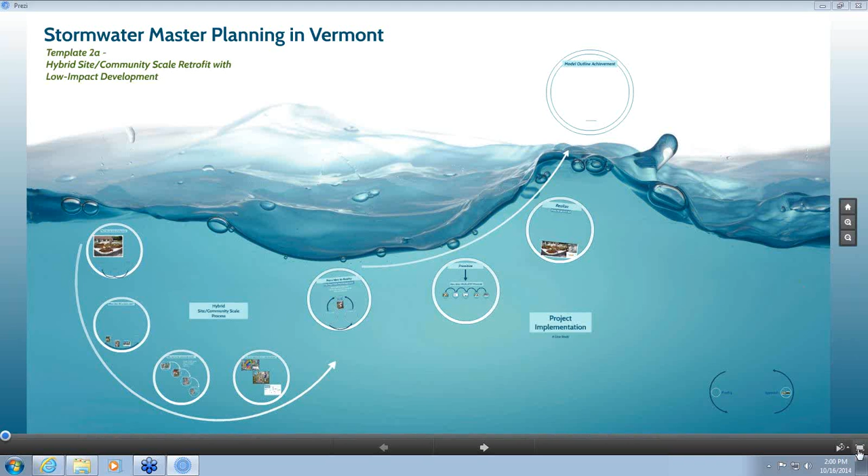Today's webinar is the third in a series of 5 on stormwater master planning, each one focusing on a different approach. Today we're looking at an approach that utilizes community-wide and site-specific modeling.

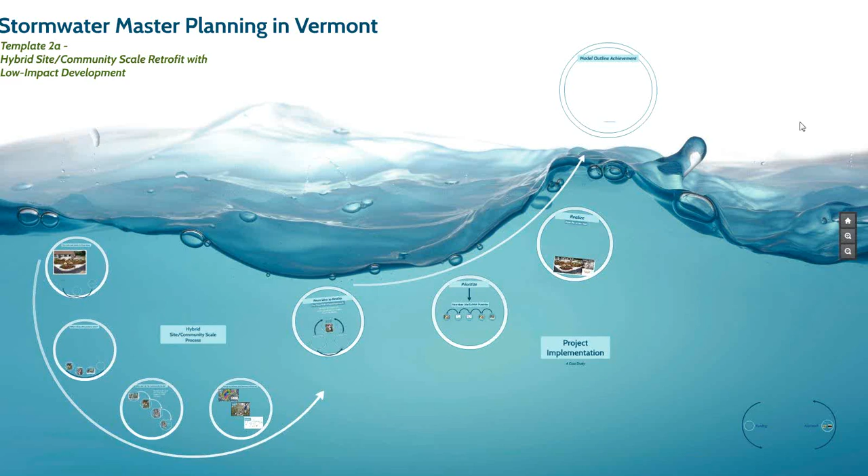So who should use this template? This is actually a fairly widely applicable template across the state of Vermont. We can talk about municipalities with large and small urbanized areas and suitable on-site conditions. Large and small urbanized areas, fairly self-explanatory, anywhere from potentially downtown Burlington to a smaller area like the developed corridor in Waitsfield, which is where we're going to be primarily focusing today.

But what exactly constitutes suitable on-site conditions? Primarily for the development of green stormwater infrastructure and low-impact development, we're talking about generally good soil, or soils that can be amended to allow for good infiltration, typically half an inch an hour or greater is something that you strive for. Recently there's been some research coming out about how to amend soil specifically for things like clay layers or barriers of that sort. So just because the soils in a particular location aren't naturally good doesn't mean that you can't work with them to make them somewhat better for your particular project.

The other thing that we like to talk a lot about with these low-impact development practices, site-specific practices, is open space. The existence of open space makes developing these projects a lot easier. However, it doesn't have to be existing open space. In fact, as we'll see today, there was an option for what appeared to be open space, which in fact wasn't developable, and the designers ended up creating some open space to build this practice. So as you're looking through this template, ideally open space with good soil is the perfect location. If you don't have that, though, don't necessarily write this template off as something you could use.

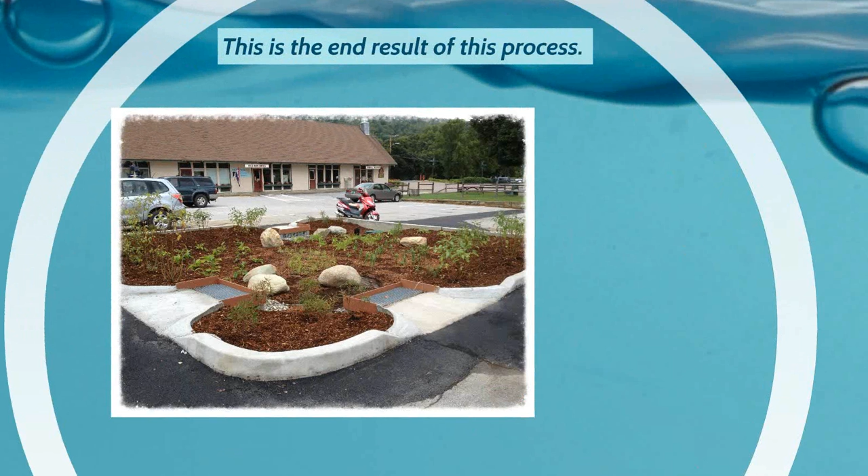So we're just going to start by talking generally about what we mean by the site, or community to site scale process. First off, I wanted to give you an idea of what this is going to look like at the end. We're going to go from a relatively large area down to a very small area as we show here.

What we've got here is a medium-sized bioretention area in the middle of a large parking lot in Waitsfield. This was actually a project co-developed by Stephanie Hurley at UVM, and Watershed did some of the design work towards the end stages of the process, and some of the operation and maintenance. So what you've got is a medium-sized bioretention area that really fits the site and responds to the needs of the community. You've looked at the watershed needs, identified some hotspots, identified some priorities, triaged it down, and then you end up with this bioretention site, or whatever the practice happens to be, where it most needs to be.

So how does this process work? Well, first off, let's just talk a little bit about low-impact development and green stormwater infrastructure. What do we mean when we're talking about this? We're essentially using the toolbox that we've talked about in the past couple of webinars—a toolbox of design and planning techniques.

Essentially what we're trying to do here is disconnect impervious cover, increase infiltration opportunities, and generally reduce stormwater runoff. Because as we've seen before, what you really want is something closer to a natural condition: 10% runoff or even less potentially, a lot of evapotranspiration, and a lot of infiltration.

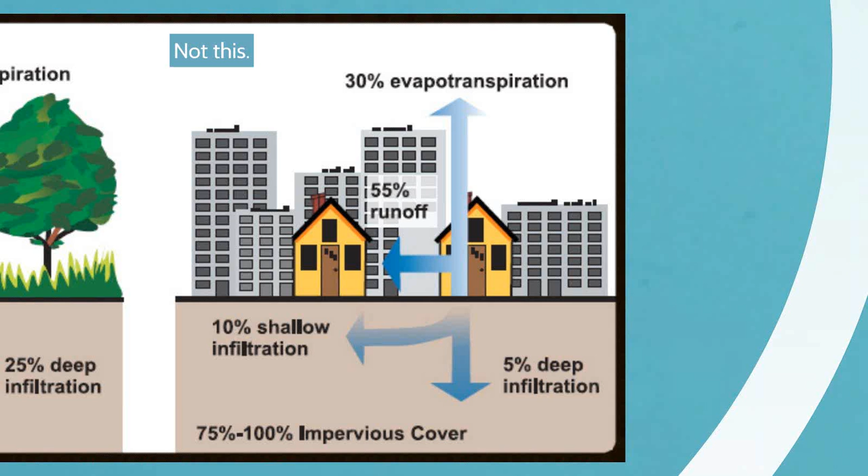Up to half of the water should be going back down into the ground, either shallow or deep infiltration. As we know from urbanized conditions, when we have say 75 to 100% impervious cover, you're not getting as much infiltration—as little as 15% in certain conditions. This is a more urbanized example, 75 to 100% impervious cover. In Vermont, we're lucky we don't have that everywhere, so these numbers aren't exactly applicable, but we want to essentially use this toolbox to increase infiltration and decrease runoff.

Low-impact development essentially focuses on using natural processes wherever possible. It's not always a natural process, but what we're talking about is essentially infiltration, using soil microbial processes to remove nutrients and other pollutants such as heavy metals, increasing evapotranspiration through the use of either urban tree canopies or perennial shrubs, as well as physical infiltration or filtration with the use of vegetated level spreaders, grass buffer strips, riparian buffers, that sort of thing.

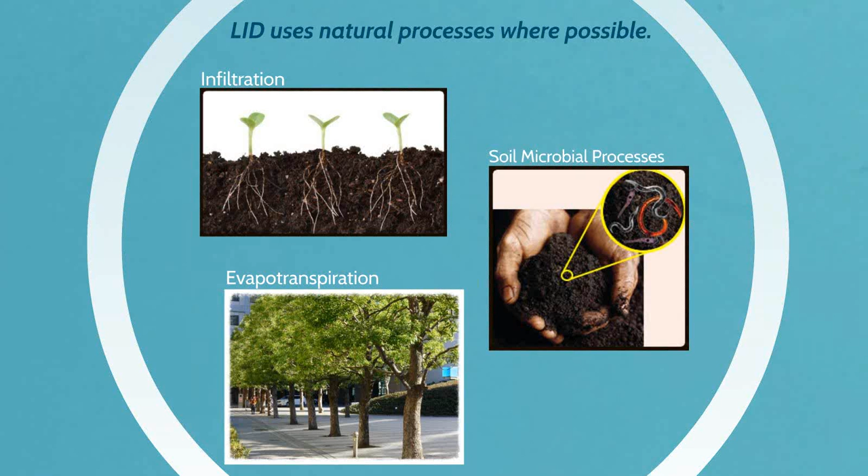These are just a few examples though. We've talked a lot about the use of rain collection devices and stormwater chambers, which aren't necessarily natural looking—there's nothing really natural about a big plastic cistern—but that is one potential thing you can do with LID, as well as planning things like street sweeping and impervious cover reduction. So they don't necessarily rely on natural processes, just provide more opportunities for those natural processes to work.

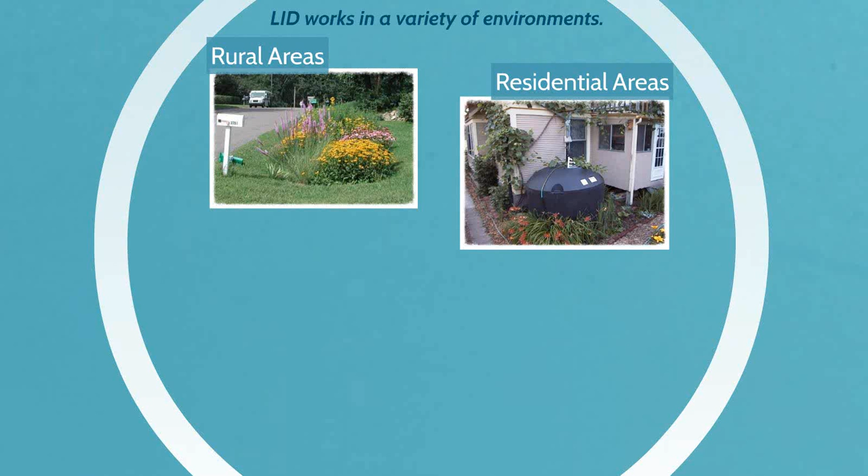The great thing about low-impact development and green stormwater infrastructure is that they can work in a variety of environments. In Vermont, we certainly have that—we've got a lot of rural areas and residential areas, so we can do things like vegetated bioswales or even rain collection, like these cisterns. That'll essentially allow us to collect a lot of this runoff that would otherwise make its way into the stormwater infrastructure system and potentially negatively impact our waterways and water bodies.

They're not necessarily a green top, but it's still going to allow for infiltration of water, so that's how you're managing it. So the take-home message here is that this toolbox is very flexible. It's got a diversity of solutions that can be used in a lot of different environments. So when you're thinking about using this template, it's really a very applicable and flexible template for a variety of sites and for a variety of communities. So this is definitely one of the better ones in terms of being able to find a solution for almost any site.

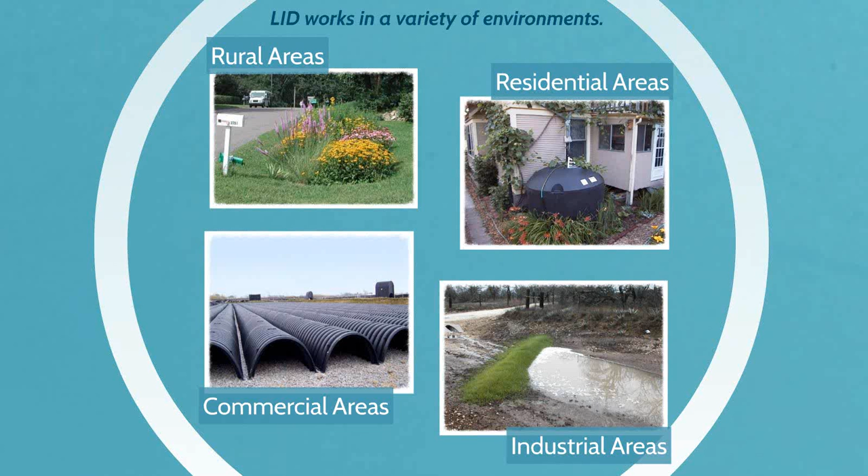So we talk a little bit about this community to site scale. What does that mean? Well, this is essentially moving from the macro to the micro. The community, or as I like to think about it, community watershed, because watersheds often transcend community boundaries. You may have to look beyond the boundaries of the municipality, which can be difficult at times given working with community partnerships and that sort of thing. But you really have to start at a larger scale to try to figure out what's going on in these particular watersheds, which ones are contributing more runoff and potentially pollution, which ones are contributing less.

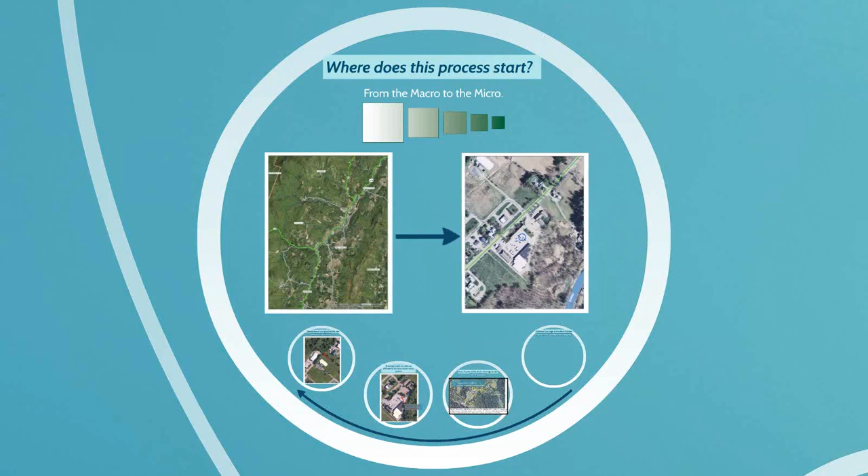So in this particular instance, we can start here. We've got this relatively large area. This is Waitsfield, the Mad River Valley, and we've got this big, long valley with a lot of complex watersheds in it. So when you start at the community scale, you've basically got to start to say, all right, how do I triage this down? How do I start breaking this into bite-sized chunks, into manageable areas? And so that's when you start to create watersheds.

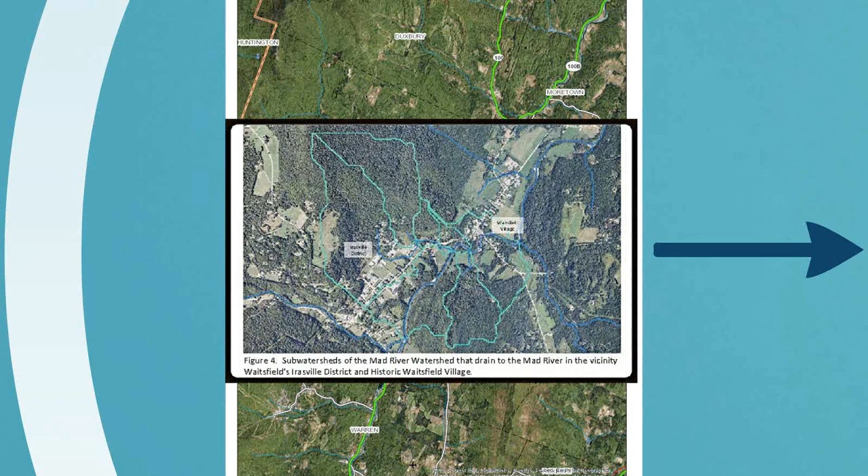Here we've got the watersheds that were created for this particular model. We'll talk a little bit more about this as we go on. But from there, you can start moving down into the site process. So essentially what we've done here, we've gone from a large scale, slightly smaller community scale, and then we're going to be able to break that information down even further, move down into the site scale. So you're moving from this massive watershed down to something maybe potentially even as small as the parking lot in the Village Square area, which is what we're looking at right here.

So the first part of this process is the definition of different drainage areas. So this just makes it a little bit more manageable. In this modeling process, essentially they created these specific watersheds, and then actually what they did is they cut them down even further. So you can see there's a straight line in the second version, this yellow line version.

What happened with this particular model is that it was determined that those upper watershed reaches weren't really having as much an effect on the runoff volumes nor on the pollutant loads. So for the sake of simplicity within the model, those were taken out. Additionally, you can see in this first version, there are a lot of watersheds off to the south of the river that were initially defined as potentially being suitable for analysis. But then in this second example, you can see they're gone.

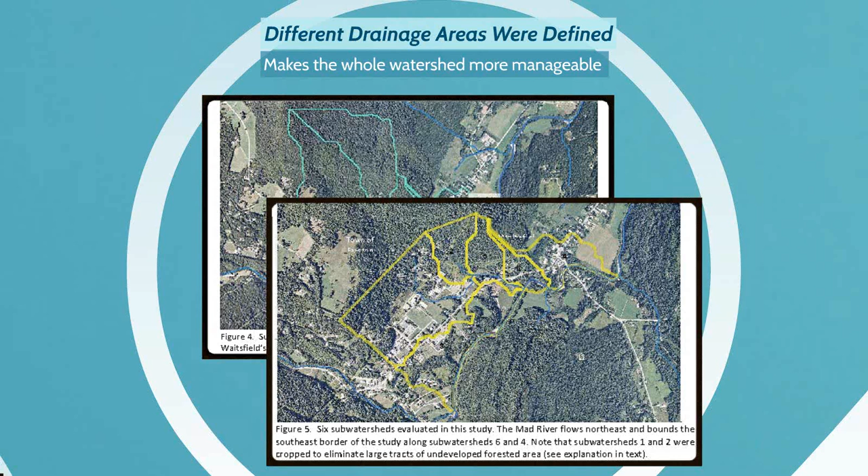And the reason for that is that if you look on this northwest side, where the yellow watersheds are currently defined, that's where most of the development is. On the other side, yes, there's some land use change. You're going from forested to open field conditions, which can have an effect on runoff volume and potentially pollutants. But it was deemed that they weren't as important for the overall modeling process. So already the process of triage starts winnowing it down to a smaller area, to these high priority watersheds or potentially high priority watersheds. That's what's going on there, just to explain that. It wasn't totally arbitrary. There was definitely a decision-making process there to make it a little bit more manageable.

So in defining these drainage areas, and this may be review for many of you, but essentially what we're looking at here is we're looking for pour points. In this process, these initial 6 sub-watersheds that were defined and chosen were defined according to natural pour points, essentially wherever a stream emptied into another branch or into a larger stream. So you can see those arrows there are pointing to that.

These sub-watersheds can also be infrastructure related or human-made. And that's often what we're going to be dealing with at the site scale, pretty much always dealing with the site scale.

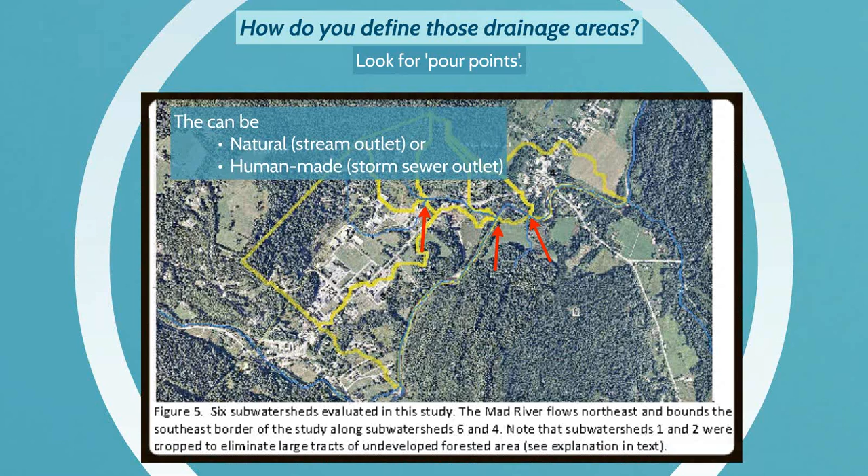So in terms of the modeling and mapping process that we've outlined thus far, it's easier to look at these natural watersheds to start to break things down into smaller, more manageable units. And then once we've got them broken down into those smaller, more manageable units, then we can break them down even further by starting to look at infrastructure layers and trying to figure out what specific drainage areas really matter.

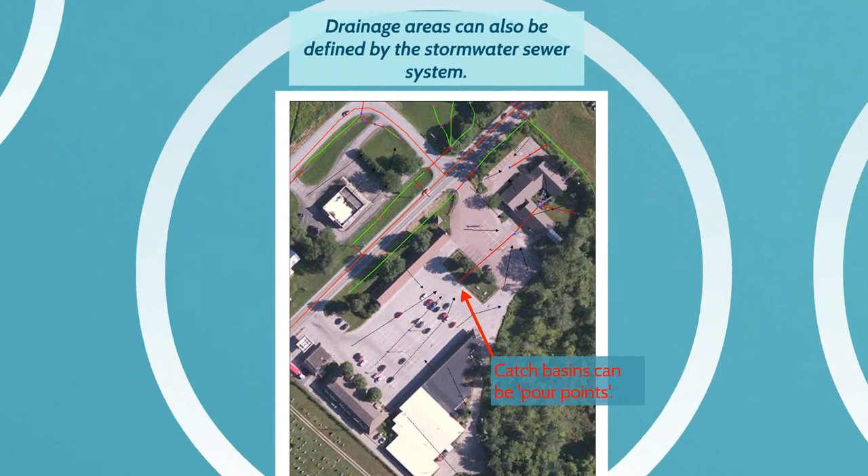So going from here, starting to look at, all right, what are the infrastructure stormwater subwatersheds? Talking about things like catch basins. They can be pour points as well. And the Vermont DEC has done a pretty good job of actually defining these for many communities. This infrastructure layer here isn't quite statewide, but for many of the communities it's available. It's generally fairly accurate, and it can be used in these modeling exercises.

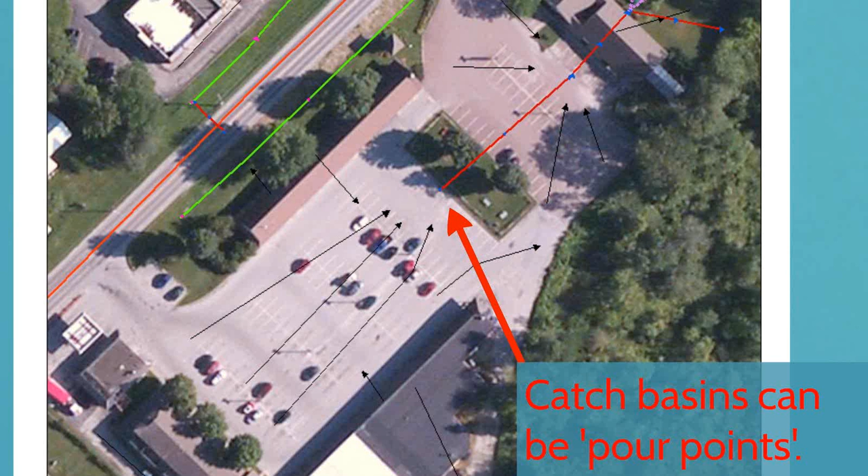And there are actually a bunch of watersheds, stormwater subwatersheds, that are based on this infrastructure layer, as well as building and topography layers, that will give you a fairly good idea of what water drains to any one point. So if you are thinking about using this template within your community, trying to establish some sites, that's a very good place to start, is looking at that data and then going out and potentially verifying it to see what projects you can start doing.

So why do we start at the community scale? Seems kind of complex. Why can't we just go out and say, find a parking lot or a building or something like that and say, all right, let's put a rain garden here. Let's put a vegetated filter strip here.

You want to start at the community scale because it gives you an idea of hydrological context. Where does the water go? What flows to what? So when you're looking at this, and you're looking at all of these chosen watersheds that you've already sort of winnowed down, you can start to say, all right, how much runoff or how much pollutant load potentially comes from each of these watersheds. So it gives you an initial cut, an initial categorization for prioritization later.

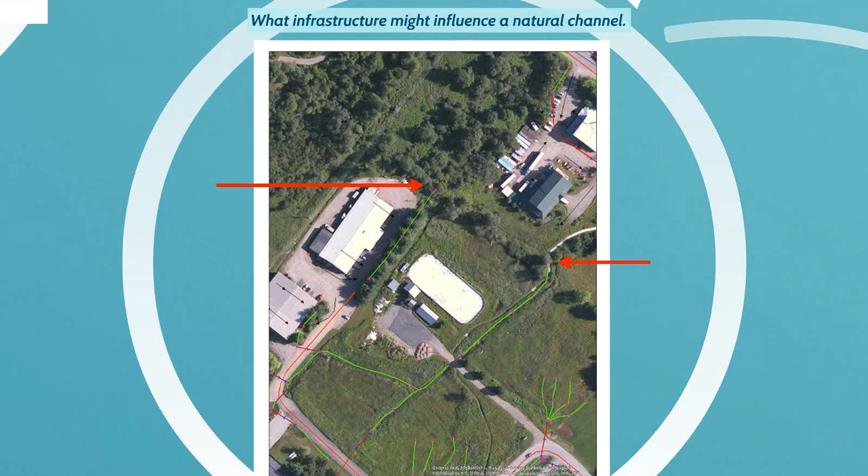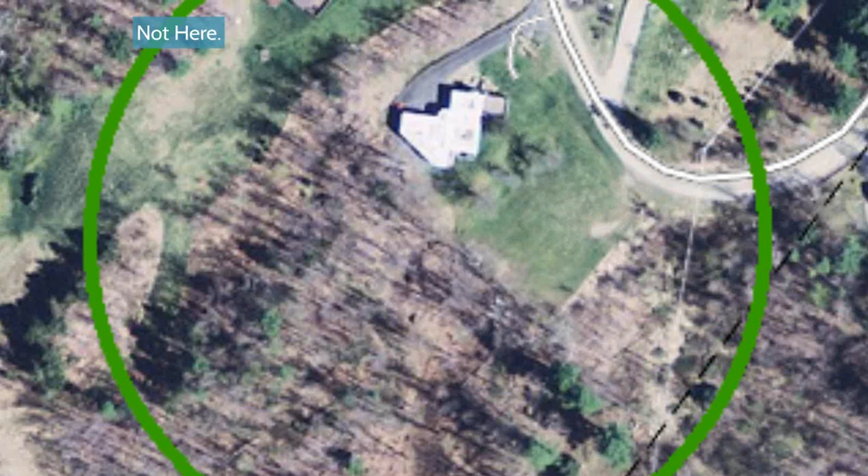Starting at the community scale allows you to look at that on a holistic basis. So you're really targeting things down. So you're looking for areas like this, not so much for areas like this. While there is land use change here, we've got basic residential development with associated access roads and driveways, the likelihood of that being a pollution contributor or runoff volume contributor is a lot lower than, say, an area like this, where it's almost 100% impervious, in certain areas.

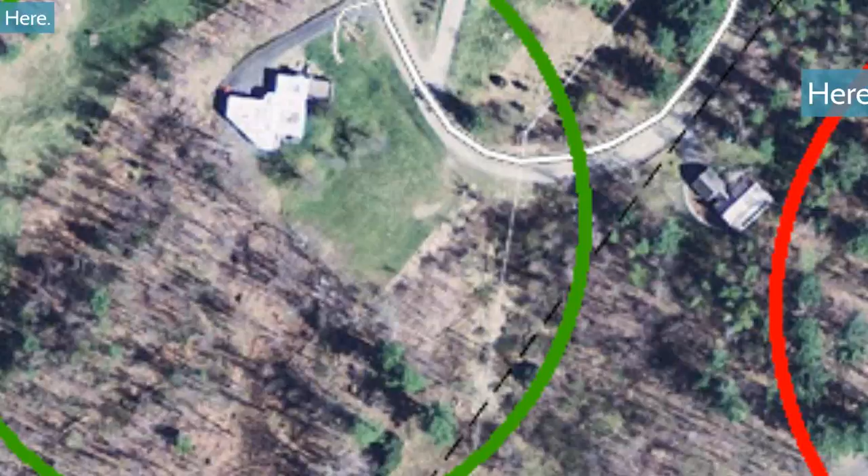It also allows you to start looking for pollution hotspots. If you know a little bit about the drainage area, if you know a little bit about the activities that go on there, you can start to say, all right, where potentially are the pollution hotspots within this watershed? What do we mean when we say a pollution hotspot?

Essentially, we're looking for things like potentially heavily fertilized areas. That could be a golf course, for example, there's usually a lot of fertilizer associated with that. Could be areas of loose sediment, which gets easily transported off this surface. If it's a parking lot, particularly near a gravel parking lot, particularly near a stream or a water body of some sort, that could definitely be a pollution hotspot area.

High traffic areas - this is a pretty broad category with a lot of different subcategories. This could include gas stations, where there's a lot of traffic in and out in addition to whatever gas might get accidentally spilled on the ground. Drive-throughs, high traffic parking lots, heavy use roads, so main roads. The main road through the town of Waitsfield, say, would be potentially a pollution hotspot just because of all the tracking that occurs with vehicles. Side roads, smaller side roads that don't get as much traffic, maybe not as concerning as those main roads.

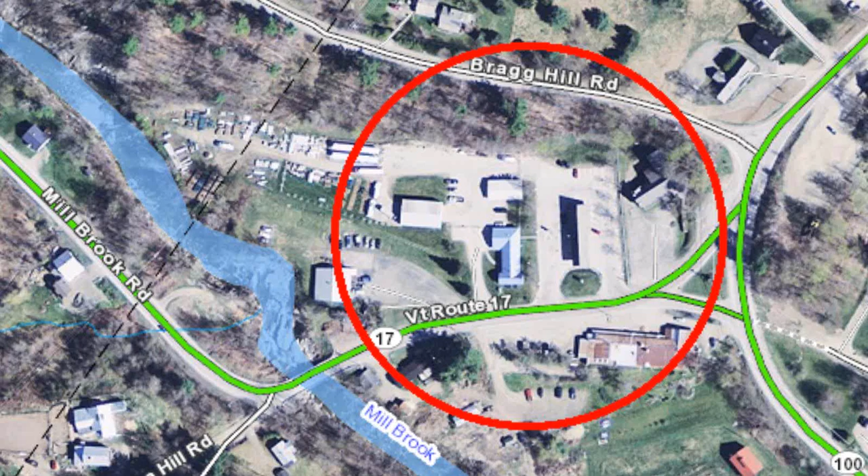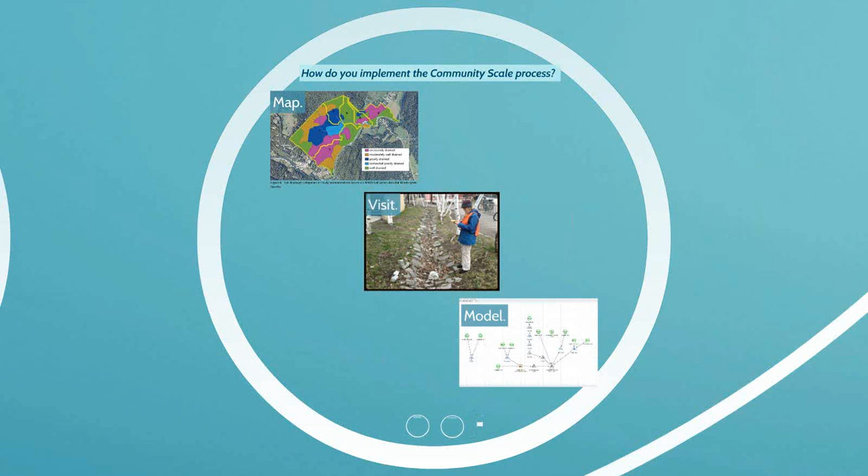How do you start to implement this community scale process? I like to think of it as three steps, and these three steps are going to occur in multiple iterations. The first one is going to be mapping.

As we've seen, we went from this large area, this big valley with a lot of natural waterways, some developed area, some undeveloped area, and then we started breaking it out into chunks, into these sub-watersheds. Then we further winnowed it down, cutting out some of the watersheds where we knew we weren't as concerned, and even cut off parts of these watersheds, as you can see with that straight line. Obviously that's not a natural watershed feature, but knowing our model and what we were really going for, we knew that taking that part of the watershed out was going to be a pretty safe bet in terms of the volume and pollutant load.

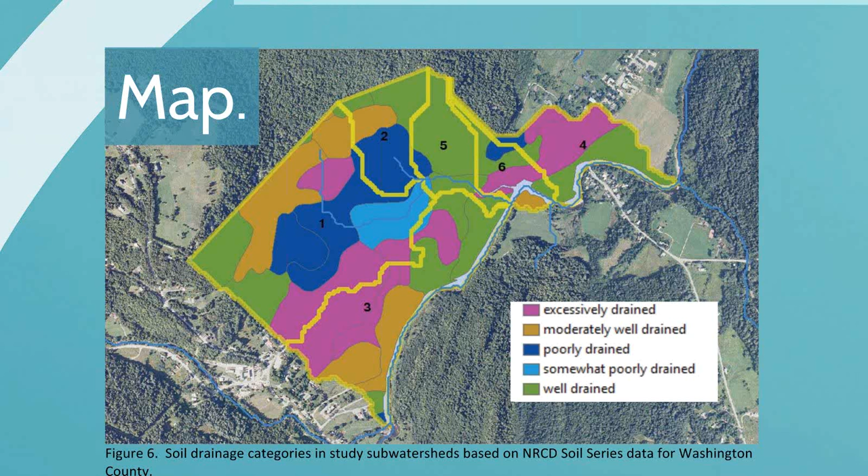So the first step you want to try is map. Get an idea of the context. Start big, and then go in smaller. Try to figure out where you really want to focus.

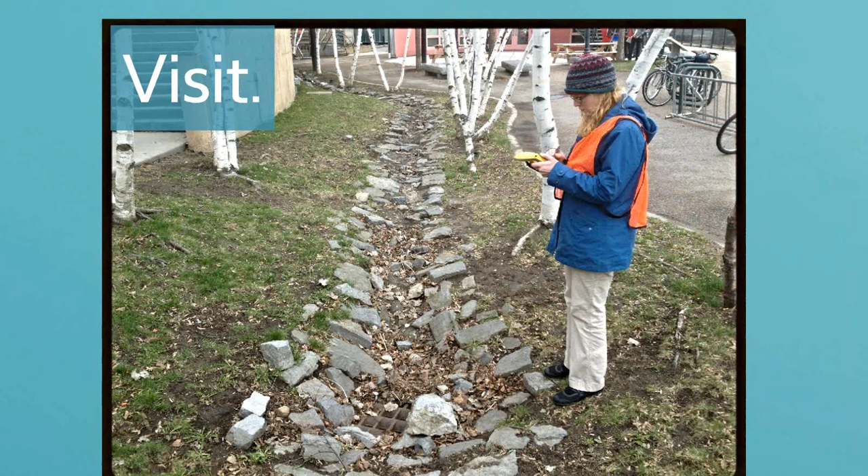The next thing you do is you go out and visit the sites. A lot of the times you'll go out and say, all right, we've defined this particular subwatershed, now we want to make sure our boundaries are correct. That's a little bit less realistic at this larger scale - walking all of these topographic boundaries of waterways is probably unrealistic. But when you get into a smaller scale, you definitely want to start to go out and visit.

Go out to ground truth your information. Go look at infrastructure, microscale variations in topography or infrastructure that could influence whatever your watershed may be. If you're mapping soils data and don't necessarily trust that data, you can go out and check the soils and see what you're really dealing with. Getting on the ground is very important, to see what's there.

Once you've got a pretty good idea of the mapped area, your area of interest, and you've gone out and ground truthed some of it, you've got a pretty good idea of what your inputs are going to be. That's when you can go back and make what I'd like to think of as the first cut model - your first attempt at really getting down to the nuts and bolts of a particular watershed.

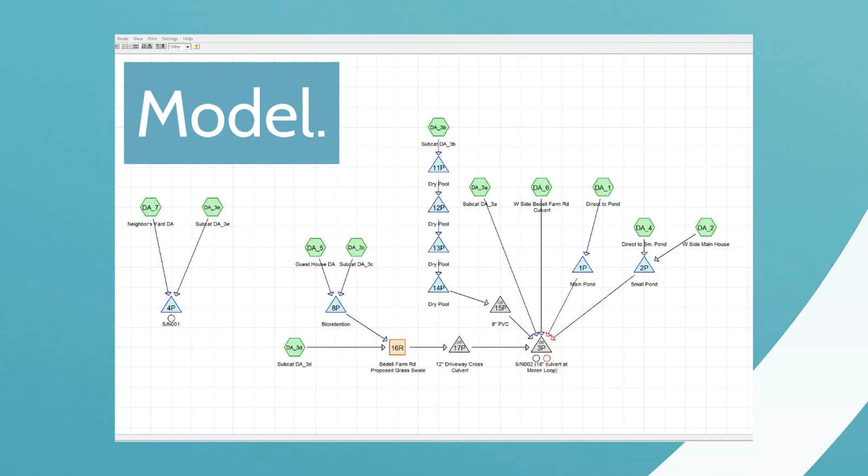This part of the presentation was especially difficult for me because we talk a lot about models and modeling, and it's very difficult for me not to make jokes about that. So I promise we're going to be talking about computer models, not male models, or any other type of models.

So what are the nuts and bolts of the map, visit, model process? Typically - and this isn't the only way to accomplish this, but it seems most effective for most communities and designers - you use a GIS to create the main inputs. You want to delineate the watersheds from your topographic and stormwater infrastructure data. You want to get an idea of land uses - forest versus commercial, developed, residential land - and gather soil data, specifically hydrologic soil groups. These are some of the most important factors in the mapping.

Some of these models can definitely use a very high-level GIS, but that's not necessarily the only thing you have to use. You don't have to use, say, Esri's ArcGIS. Some of this can be accomplished with paper maps, or something as simple as Google Earth - anything that allows you to do some sort of measuring. As we explore these models and their input needs, that'll become a little clearer.

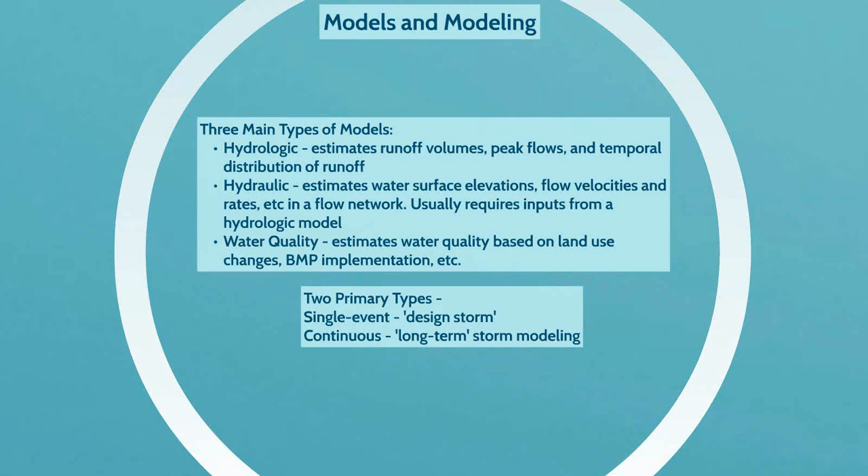These are particularly powerful for water quality modeling. They're going to give you the best idea of continuous wash-off, because a lot of storms are much smaller than the 1, 10-year, 100-year storms. 90% of storms are under 0.9 inches, typically, so these are best for estimating pollutant loads associated with those storms. It's very important to understand the difference between those two: single event is very important for certain types of sizing and design, but continuous is really important for water quality estimation.

So when you're choosing a model, what are the factors you're looking at? Well, what are you modeling for? Are you looking at volume? Are you looking at flow? Are you looking at water quality? Or do you want to do all three? These are the questions you need to start asking yourself.

So if you're just doing a volume reduction, say with the flow restoration plan, you're going to be looking at volume and flow, not necessarily water quality. It's a good thing to do, but it's not necessarily the primary focus. If you're designing smaller practices, like a lot of these low-impact development and green stormwater infrastructure practices, you're concerned with flow and volume, but also very much concerned with water quality and capturing these smaller storms. So if you're going to implement this template, that's definitely something to start considering right off the bat - what's the most appropriate model for what I'm actually developing.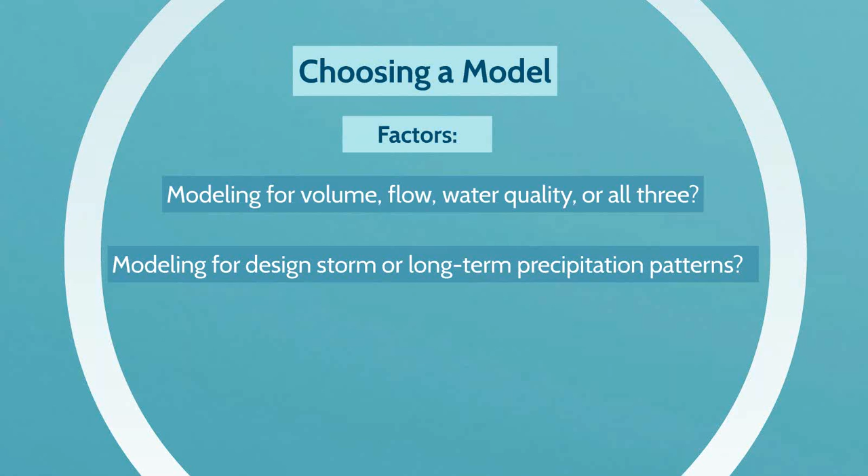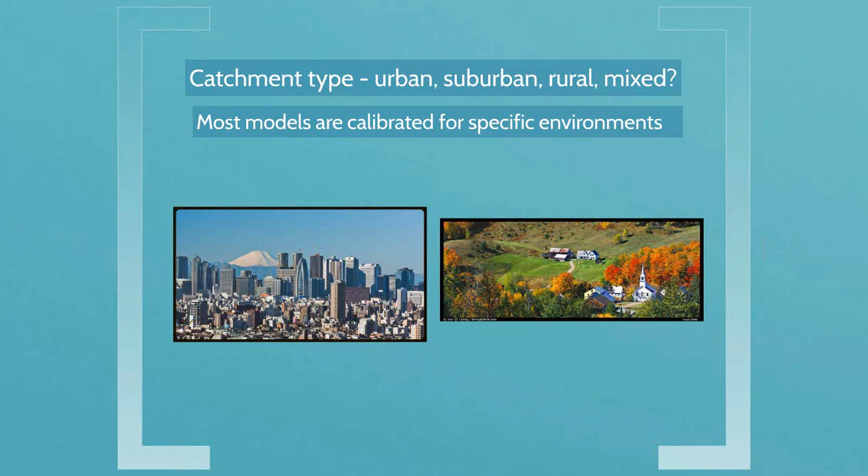And you may end up using a combination - modeling for the design storm, or modeling for long-term precipitation patterns, and a combination of the two may be appropriate. Finally, the other thing to keep in mind is that a lot of these models are developed for specific areas. Some are definitely more skewed towards urban areas, while some work better in rural areas. Some are actually pretty decent for both, but it's important to know when you're choosing this, where you're working and what's the most applicable model you might be able to use.

There's actually a really great introductory resource to stormwater modeling, and it's under the Minnesota Pollution Control Agency's website. This will be on YouTube, so we'll be able to distribute that and you'll be able to grab it there. You can also find it very easily by Googling Minnesota Pollution Control Agency, Intro to Stormwater Modeling.

That's actually a really great resource to start to break down just what are all these models, what do they do best, what do they require from the user. And in fact, they put out a great table. This is actually a dynamic table. You can start to look at, alright, I'm looking for a water quality model, which one should I look at? Or I'm just looking for a combined hydraulic and hydrologic model, which one should I look at? What are the sort of inputs necessary, that sort of thing.

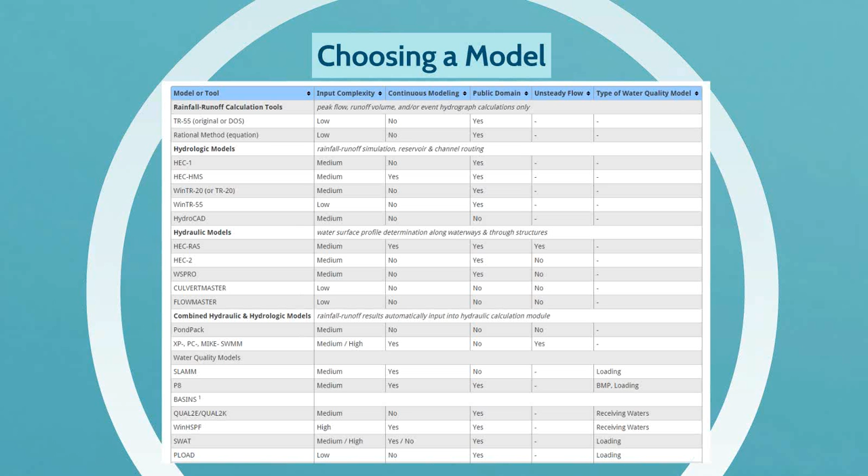Because they break it down in terms of input complexity. Do they do continuous modeling, so that long-term precipitation modeling? Or is it more of a design storm, discrete events? They also tell you whether they're free or not, which is quite nice. And then they give you also the type of water quality model, and you can actually link to individual descriptions of each of these. So that's actually quite helpful.

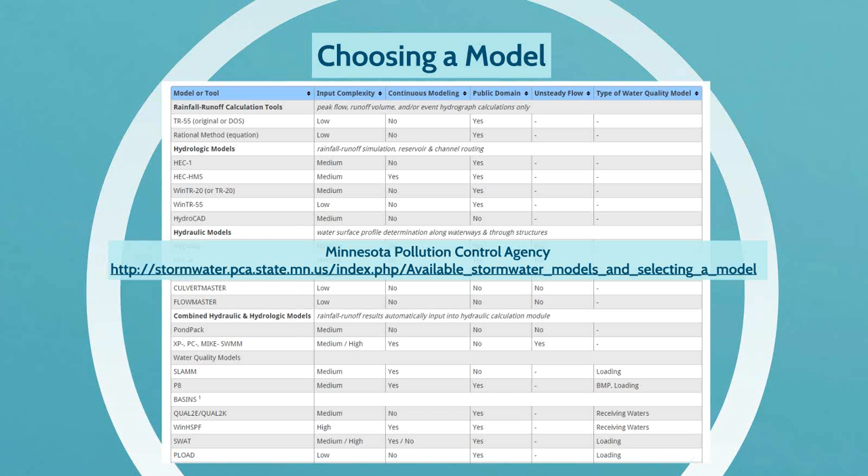And that's at this website right here. Again, if you go to that main page, you can get to this table fairly easily. This will be on the recorded webcast YouTube afterwards, so you can pause it there and snag it from that website.

So just to briefly talk about some of these, some of the more common ones you may see out there. We've got 5 different ones we're going to talk about, and the first one we're going to talk about here is HydroCAD, primarily because HydroCAD is such a common model. It's a combined hydrologic and hydraulic model. It's used a lot for regulatory compliance with the unified sizing criteria, which has been adopted by a lot of stormwater manuals in Vermont as well.

So what is it particularly good for? Well, again, it's one of those design storm models where it's good for discrete events. This is really good for sizing of practices, figuring out potentially ponded area in a bioretention area or a basin. It works pretty well in urban and rural environments, so it's fairly flexible. And as I mentioned, it's used for regulatory compliance.

It's not particularly good for pollution modeling. There's no built-in pollutant modeling here. You could potentially use it, sort of looking at volume and volumes reduced and that sort of thing, but again, it's not built into the model itself. So doing that requires a lot of user input and potentially a lot of user error, so it's not often really used for that. And it's not good for continuous precipitation simulation. So it's really just for those larger, quote-unquote, extreme storms. You can enter smaller design storms, but again, not really its strength. That's not really what it's designed for.

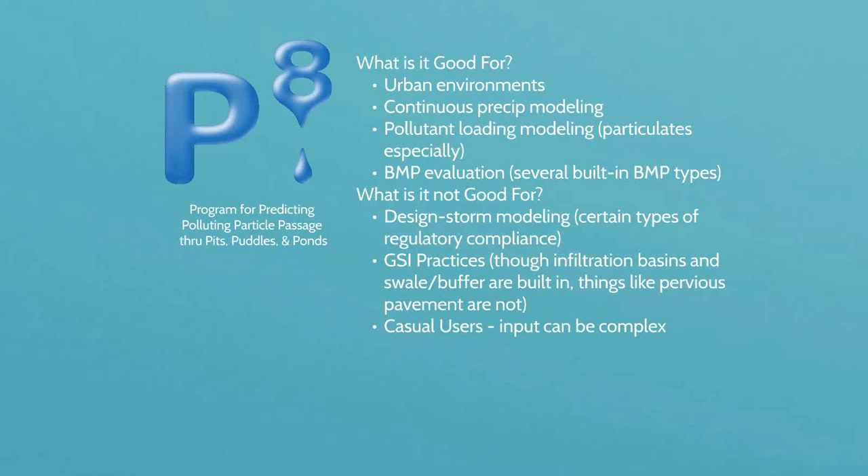So this is another one, the P8 model, the program for predicting polluting particle passage through pits, puddles, and ponds. We'll have a contest to see who can say that the fastest. Primarily the reason I mention this one is that it serves as the basis for the Vermont BMP DSS model, the best management practice decision support system.

That particular program in Vermont is currently being used for flow restoration planning. So many of you who may be participating in that process now, this is the basis for that. It's primarily an urban environment model.

It does continuous precipitation modeling, pollutant loading modeling, as the name suggests, particulates particularly. And there are several built-in BMP types, so that does make it somewhat easier to evaluate BMP usage. So it's not necessarily great for design storm modeling. In fact, I think that oftentimes that has to be supplemented with HydroCAD for certain sizing criteria and modeling.

GSI practices, there are some built in, but things like pervious pavement, that's not something that it models particularly well. And it is a relatively complex model, so this is not the sort of thing you can just jump into very easily, but it is out there for a lot of these other practices.

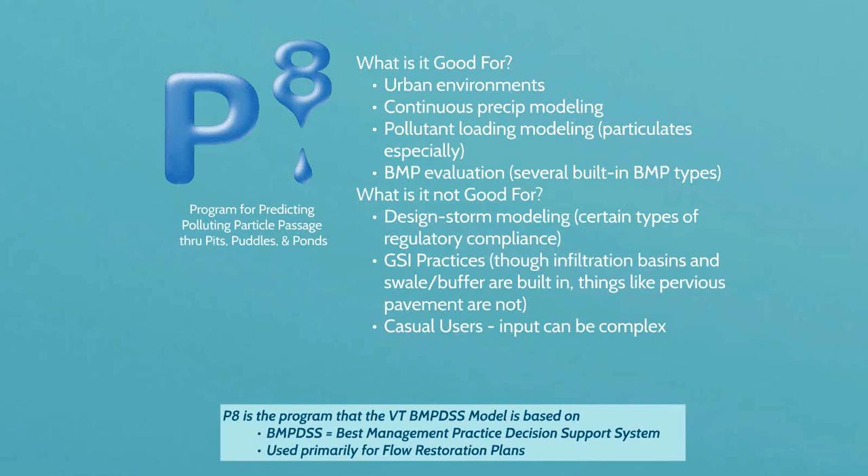One of the last ones we're going to talk about in terms of modeling, and this is the model that was used for this particular project in Waitsfield that the template is based on, is SLAMM for Windows, often known as WinSLAMM, the source loading and management model.

This is primarily an urban-rural model, but it's definitely more skewed to urban environments, so using it in a developed core is more appropriate than using it, say, in a residential area. It models continuous precipitation, and it picks up pollutant loading modeling. What's interesting about SLAMM, which is different from a lot of other models, is it's based on field observation.

So actual tested values, wash-off values from some of these particular land use types. We'll get into how SLAMM separates those out. But that's the interesting thing to keep in mind here, is that this is based on actual values, not just theoretically, statistically proven values. Not to say that these other models with theoretical or statistical value models are invalid. It's just that this one can be more accurate for certain types of land use.

It also integrates green stormwater infrastructure as well as low-impact development. So again, what do we mean by low-impact development? It's a whole toolbox, not just structural but non-structural practices. So you can actually model things like street sweeping in it, which is fairly unique in the modeling world.

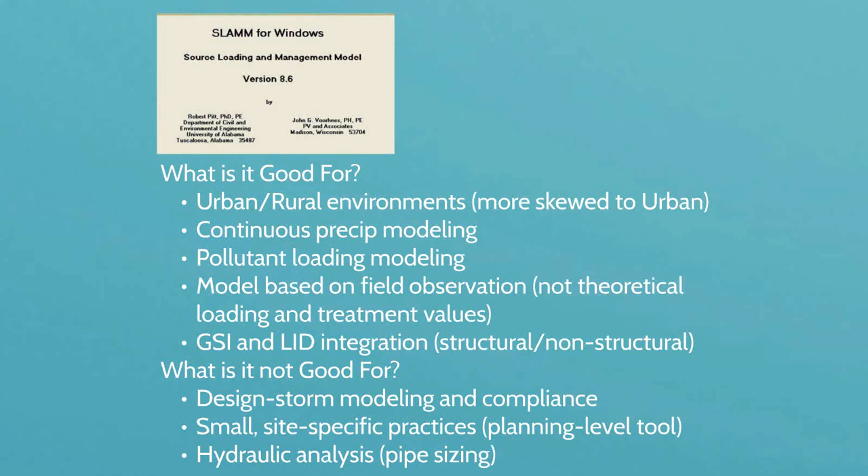And then the last one I wanted to talk particularly about is just the simple method, and the way that can be implemented, particularly in Vermont. The simple method is essentially a way of looking at a particular area of land and developing what's called a runoff coefficient, or how likely water is to run off that surface. It's essentially based on the impervious coverage of a particular land area, just turned into a coefficient.

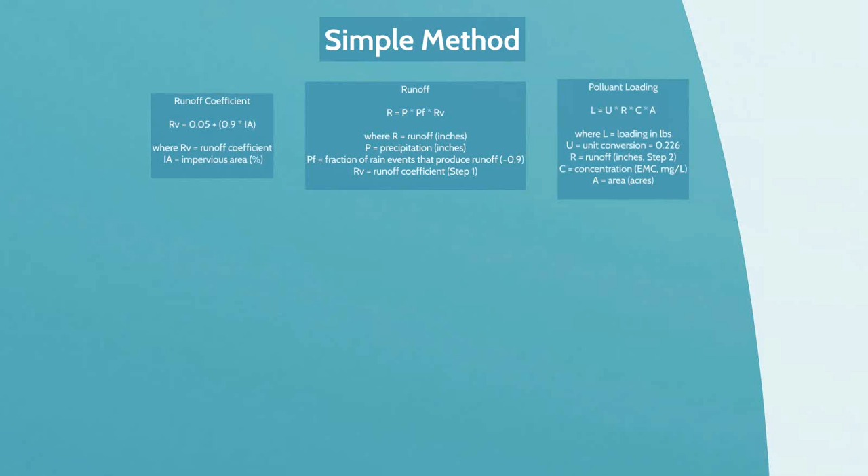If you want to take it one step further, if there's a known concentration of runoff coming from a particular land area, but that's not as common. It's typically used more as a volume-based calculation. And the DEC has actually developed an Excel worksheet that essentially does this calculation for you, so it's very simple to use. Again, it's Excel spreadsheet based, so anyone running Excel or a similar spreadsheet program can use this very easily to essentially get a water quality volume.

Just to clarify one thing here on the slide, the simple method is an empirical spreadsheet tool used to calculate loads of pollutants. The water quality volume spreadsheet below is just a shortcut method to calculate the volume generated during the water quality storm, which is the 0.9-inch storm. That's the volume-based equivalent, typically thought of as the volume targeted for treatment. Whereas the simple method is used to calculate pollutant loading, based on average concentration values for various land uses.

So it's really a rough cut model, but it's used quite a bit in Vermont, and it's used during the regulatory process for assessing various pollutant loads, basically to offset pollutant loads generated during development.

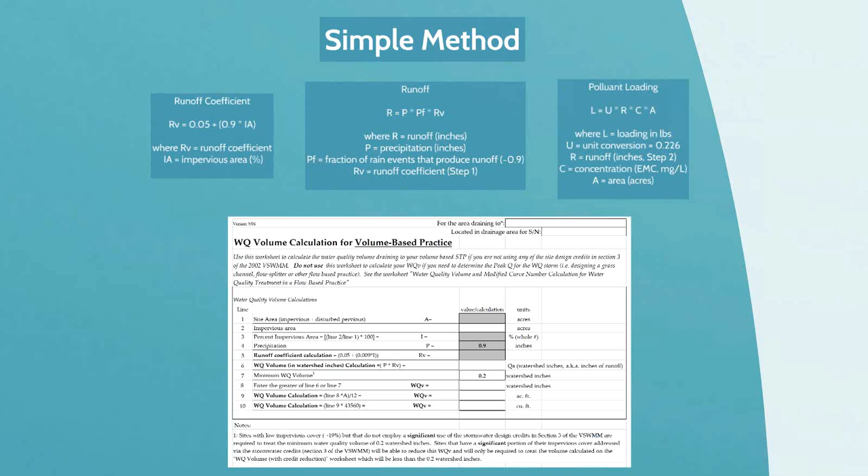Just another note on this particular spreadsheet shown here, it's the volume calculation. There is a flow-based calculation, but just a caveat, this is just for water quality volume. That can be found on the Watershed Management website.

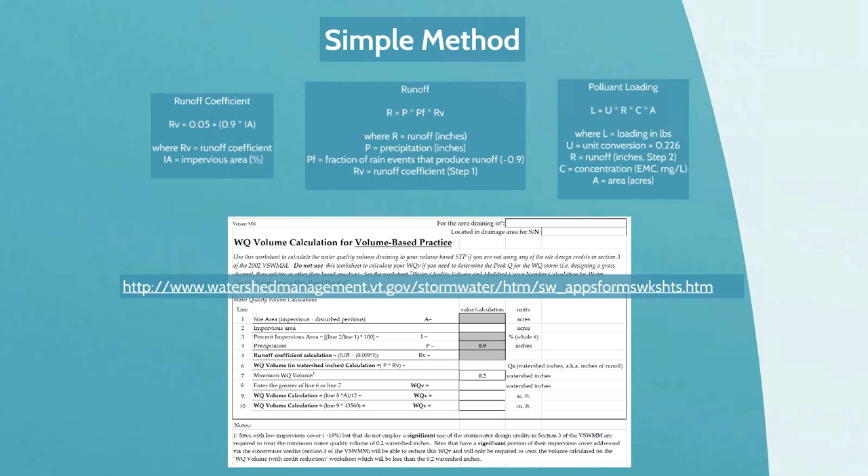Now that we've looked at a few of these different options, for this particular template for the bioretention in Waitsfield, the designers used a combination of the WinSLAMM model and the HydroCAD model. As we get into this a little bit, we'll see why that is. This is a pretty common practice, to use a combination of models to start to get at what the benefits are of a particular practice in a particular location.

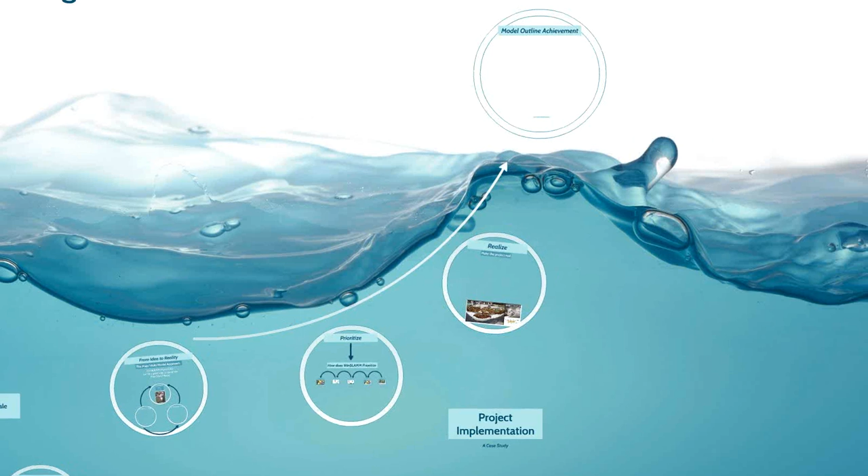So we're going to start to look at specifically how this project was implemented. We're going from idea to reality, and this is the map-visit-model approach made real, essentially. We're looking at that WinSLAMM-HydroCAD combination. How are we going to use that here?

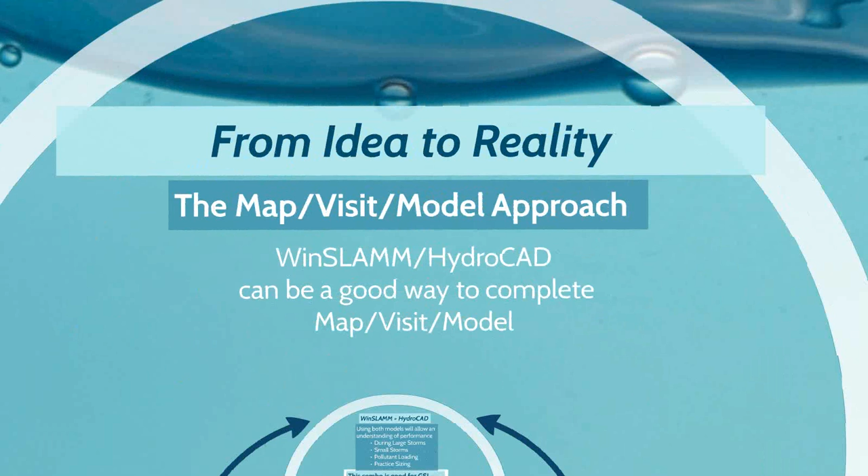We look at WinSLAMM in terms of how it's different from other models. Many runoff models focus on the larger, more rare events. These are definitely important, causing significant problems like flooding, erosion, and road collapse with larger, more intense rainstorms. While these are serious water quality problems, they're only part of the issue. There's a lot of pollutant wash-off that occurs in smaller, more frequent storms.

So let's try to get at that. WinSLAMM focuses on these common, smaller rain events. That's where it really becomes important for designing low-impact development and green stormwater infrastructure practices. Those smaller storms contain the first flush of pollutants, things that have accumulated over time on the surface of the land or on roofs, that are then flushed off into the stormwater infrastructure. We're talking about things like sediment, which can contain bound nutrients, particulate or dissolved nutrients, often bound up in sediment.

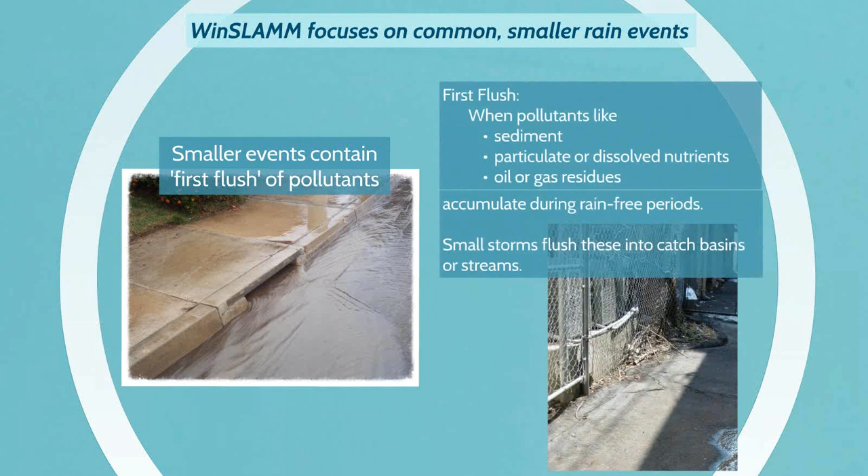Oil and gas residues, heavy metals off roofs, and that sort of thing that may have been deposited out of the atmosphere accumulate during rain-free periods. These small storms come through and flush these into the catch basins or streams. So WinSLAMM is able to get at these pollutant loading estimates in a very systematic way, and that's why they use it here.

This WinSLAMM and HydroCAD combination is a really good way of getting at what the pollutant load is associated with these smaller storms. Then using HydroCAD, as we talked about, that's a hydraulic and hydrologic model. You can start to look at the larger storms, these design storms, how much volume is expected to be generated, and use the combination of these two tools to use WinSLAMM to prioritize a watershed and use HydroCAD to size the green stormwater infrastructure practice at a particular location.

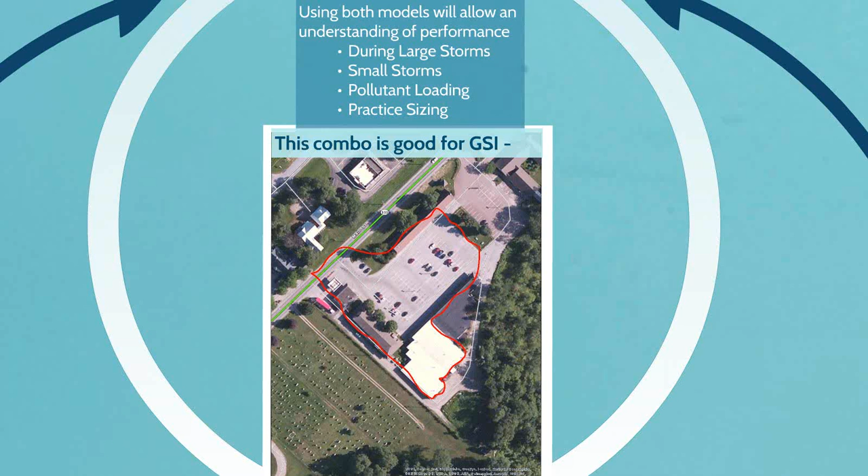How much water can you expect in the larger storms? How much of it might you be able to retain? How much of it might be able to infiltrate? It's a really good combination for green stormwater infrastructure. It essentially allows us to triage sites by priority, model those small storm pollutants, and then size the GSI practice.

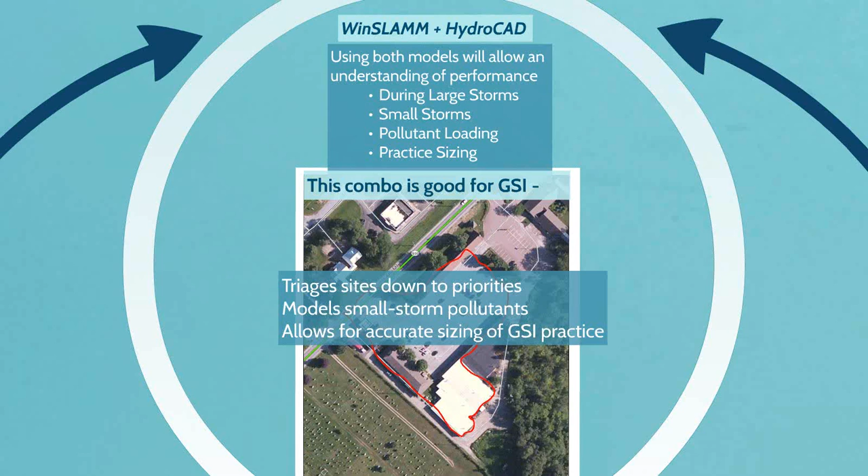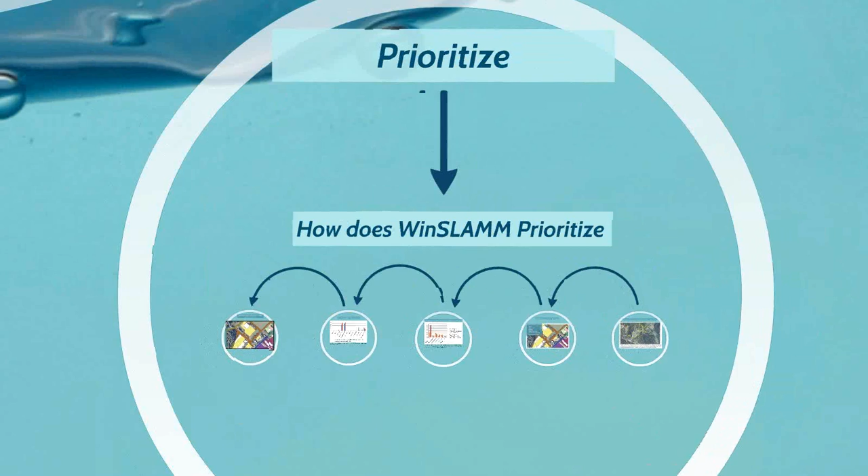This, I think, is really one of the most powerful aspects of WinSLAMM: how does it prioritize? How can we use models to prioritize these stormwater projects? So again, the first thing we do is start with these six subwatersheds, breaking it into smaller bite-sized chunks.

From those subwatersheds, we then start to classify them into source areas. WinSLAMM has a number of different source areas, so roofs, driveways, streets, etc.

Why does it do this? Why would we be concerned about this? Well, obviously a roof has a different potential pollutant load than a driveway. Roofs, typically you're not seeing sediment, you're not seeing a lot of tracking from vehicles, obviously. You're seeing atmospherically deposited pollutants, things like heavy metals, sometimes NOx and SOx compounds that will sit on that roof and during a rainstorm will get washed off. You're not necessarily seeing the same sort of sediment or maybe phosphorus load you'd be seeing from a gravel parking lot.

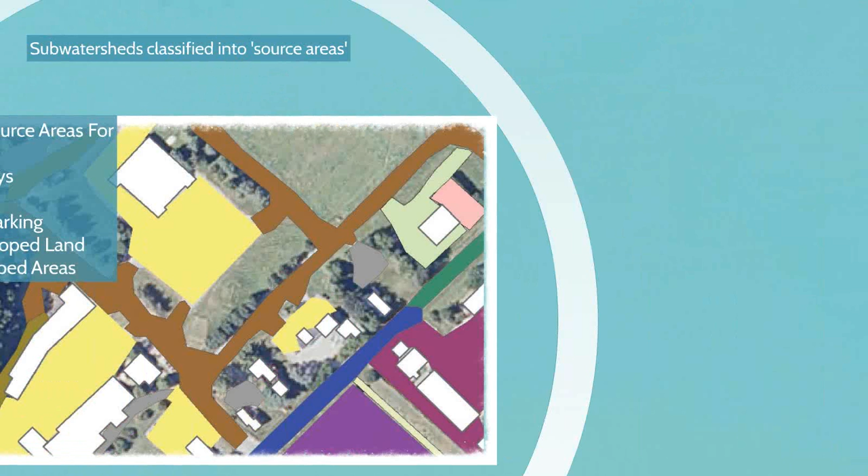Why split out driveways versus streets? Well, driveways and streets have very different traffic loading capabilities. Driveways typically have lower volume, and you're not going to see as much tracking or debris on them. So they will contribute differently in terms of pollutants, whereas streets have higher traffic, more things falling or potentially falling off vehicles, and tracking from dirt roads and dirt driveways into the roads. So those are going to have a slightly different runoff coefficient, or pollutant coefficient rather.

It's slightly different than paved parking. Again, parking tends to be a little bit lower traffic, so the pollutant loads are lower there, or different anyway. And then you start to think about, well, what's undeveloped land? Essentially WinSLAMM looks at undeveloped land as land that's in natural conditions. Typically in Vermont you're talking about forested land, land that can take quite a bit of water and not generate that much runoff. It can also be open areas such as meadows if that's a naturally occurring condition.

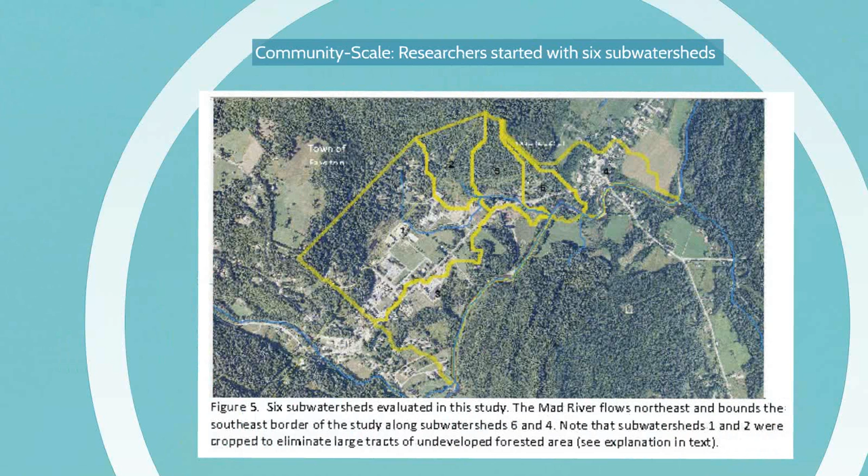Again, we'll notice back here with this slide, that line up there cuts those watersheds off, and it's because most of the land up in that area is quote-unquote undeveloped land. Yes, there is some open field, but for the most part it was deemed to be not as important because it's undeveloped. So that doesn't contribute as much in the WinSLAMM model in terms of its runoff or its pollutant load. That was the rationale for cutting off those watersheds.

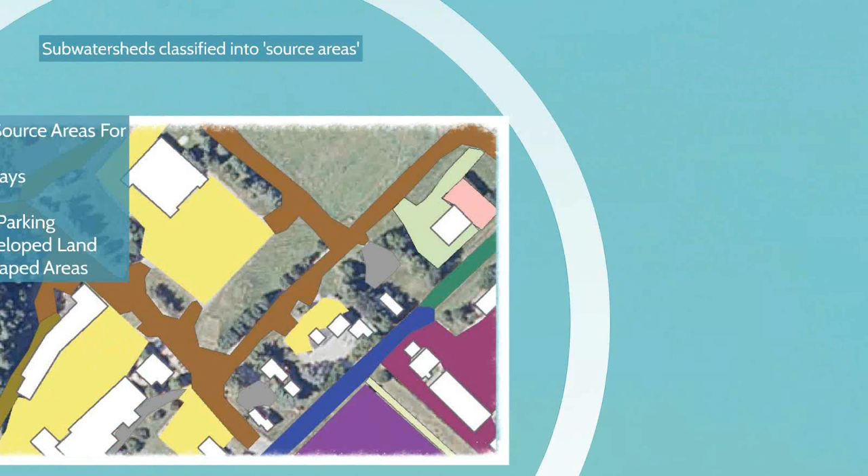So then finally you get into this last category, and there are actually several other categories. We just broke it down into these basic ones for this particular study. The landscaped areas include any areas like lawn, garden, golf courses, any sort of open area that's not in its natural condition that's also not impervious. So that's how you start to break down these areas, giving you an idea of these pollutant source areas.

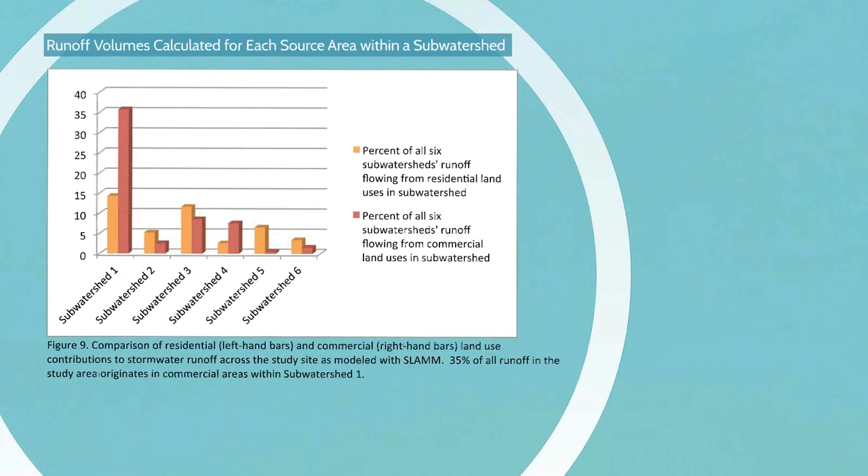So then once you've done this, you can start running the model for particular subwatersheds, and you can do stuff like contrast the percent runoff volume for different watersheds. So here we've got subwatershed 1, for example. On the left-hand side there you see in orange, that's the percent runoff from residential land uses within that subwatershed.

And on the right-hand side in red, that larger bar that goes up to 35%, that's the percent runoff from commercial land uses in that watershed. Those values are assigned for each of these subwatersheds. So looking at subwatershed 1, there's a lot of water coming off commercial land uses within subwatershed 1. That's got a lot of water coming off potential hotspots, potential large impervious areas.

This is where you start to actually get into the nuts and bolts of triaging down and figuring out which subwatershed you want to focus on. Subwatershed 6, on the other end of the graph, not as much water coming off it generally, and not as much water coming off commercial land use. In fact, it's more residential. Probably not as high a priority.

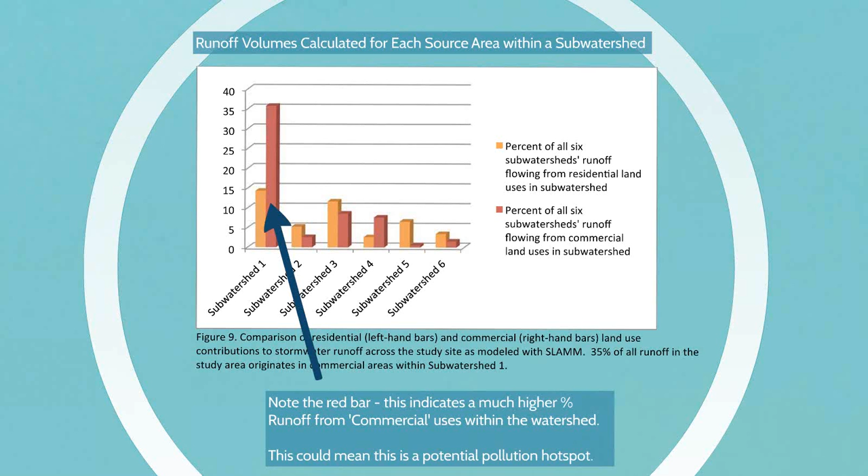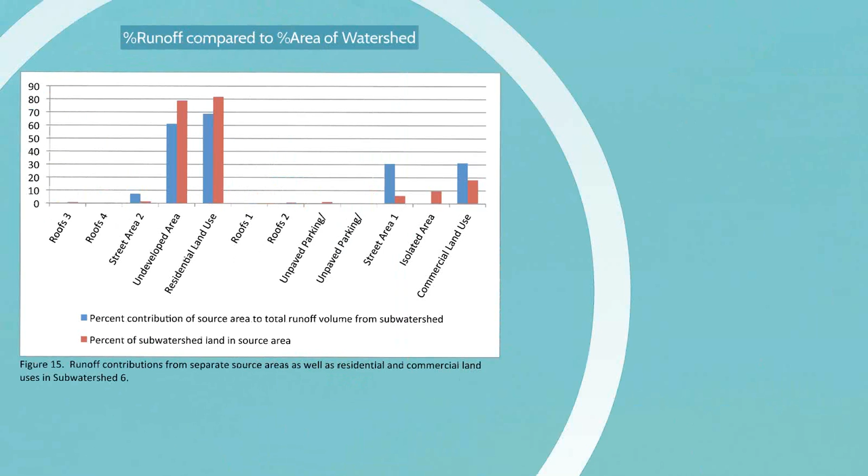So this is sort of the first cut. Then we can start to break it down even further. We just looked at subwatersheds and some general categories of runoff. Now we can start to look at percent runoff compared to the percent area of watershed.

So what are we talking about here? Well, we've essentially got two bars. The blue bar, that's water, the percent runoff. The red bar is the percent area of watershed. For each of these source areas, street area 2, street area 1, commercial land use, the blue bar, the percent runoff, is much more than you would necessarily expect from the percent area of the watershed. So it's a relatively small area contributing a relatively high volume of water.

So that starts to maybe pull a trigger in your mind and say, all right, what's going on here? Why are these contributing so much more volume than they're making up in terms of the total area? Are they directly connected to impervious? Is there a particularly high runoff coefficient for these source areas?

So that allows you to then go back to your map and look at, say, street area 2 and start to evaluate, all right, what does that exactly encompass? What is it connected to? Is there any opportunity potentially to do anything here? So this is just getting down to a finer and finer scale, moving from that large-scale community down to this is almost site-specific at this point, depending on how you map it. Again, it depends greatly on the inputs. But this is starting to get down to where you can actually select specific sites for your practices.

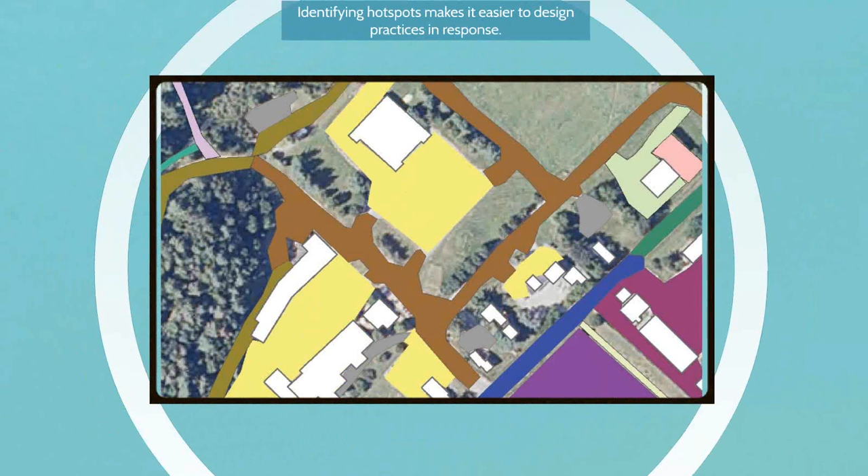So like we were just talking about, maybe street area 1, maybe that's that particular area. It's actually a parking lot. We're just using this for illustration purposes. But looking at that street area 1, is that somewhere we're concerned about? What's under there? Is there an area to do something with? There's some open space next to it. Potentially, if this is actually contributing that much runoff, maybe that's some place we can work in.

Same with commercial land use there on the west side. That's potentially another spot that you could do some sort of practice in. So this just basically lets you get down to a finer and finer scale to start planning these particular practices.

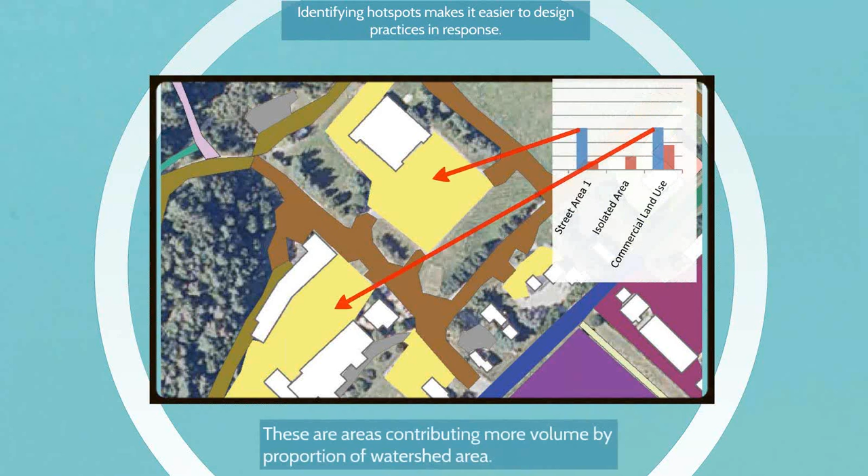So finally, you've come from the community scale, you've broken it into these smaller pieces, you've finally gotten down to these critical source areas where you've identified, all right, there's a lot of runoff coming off from this one small area. Let's actually do something. Let's try to make this project real. So you've prioritized, you've got your list of potential projects.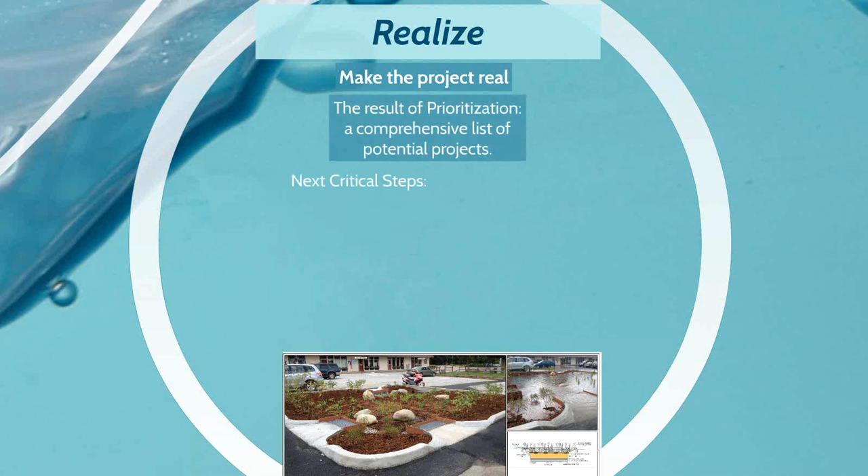So this is, in a way, I feel bad about this slide because we spent so much time talking about modeling and prioritization. This is oftentimes the hardest part of any of these projects where you've finally identified a site. Now you can actually try and go and make it real. So you've identified your priority source areas.

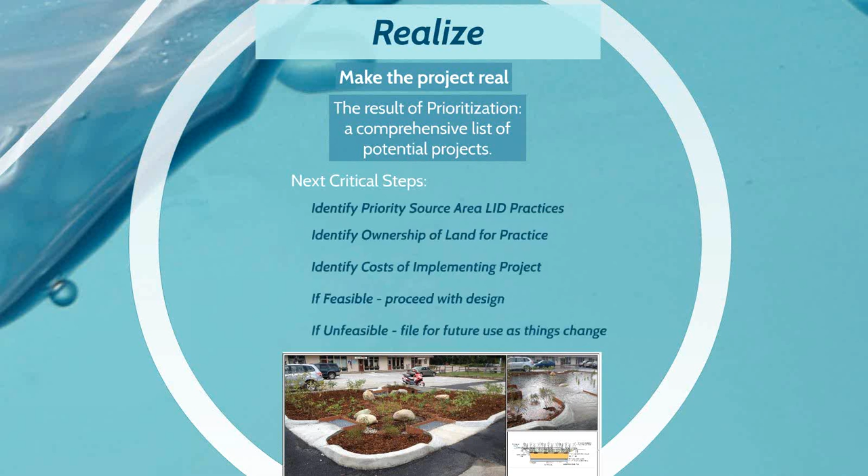You've identified the ownership of the land here. You've identified some of the costs associated with implementing this project. If it's feasible, you proceed with the design. If not, at least you've got the information. You've got these priority sites for future potential use. So in terms of the project in Waitsfield that this template is based on, we'll go back to this picture. This is the bioretention area.

Based on Stephanie Hurley's study, the prioritization identified this particular area, the Village Square area, as a hotspot for runoff. It's a large impervious area with a lot of catch basins that go directly into a swale that then outlets into the Mad River.

So they knew it was a potential problem site, and they knew there was a potential solution there. Looking at the area, you can see in the background of that picture a large green space—an open space that had been identified.

However, on a subsequent site visit, it was found that that space was actually a leach field, so essentially that was ruled out. It was almost back to the drawing board, almost like nothing's going to happen here—that open space was unfeasible.

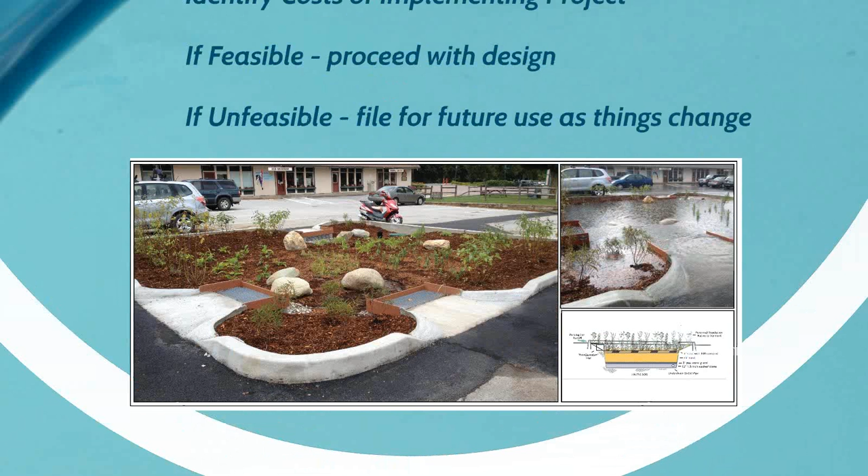But it doesn't necessarily have to be open space. If you've got a willing property owner, and in this case they did, to take away a few parking spots—I think it was six—and put in a bioretention practice that's both aesthetic and functional right in the middle of the parking lot, they were amenable to that. With a relatively small amount of work to get drainage into this bioretention practice, they were able to site it right in the middle of the parking lot.

You can see there are some concessions made to both protection of the practice and protection of the garden, with RainGuardian inlets to prevent scouring in the garden. There's definitely a lot of flow that potentially goes into this garden, so a safety overflow was designed in.

That's where a program like HydroCAD becomes more important. The designers were able to size it to pond up a certain amount of water before overflowing into that overflow pipe, which was designed so the garden wouldn't just overflow onto the parking lot and back up and be a nuisance. Essentially, that's the relief valve.

WinSLAMM is maybe not the best model for doing that particular part of the design—modeling that ponding, modeling that overflow. That's where the combination of WinSLAMM and HydroCAD really comes into play. WinSLAMM prioritizes it, triages it down to important sites, and then HydroCAD can size the practice most effectively so as not to take up too much space within the parking lot.

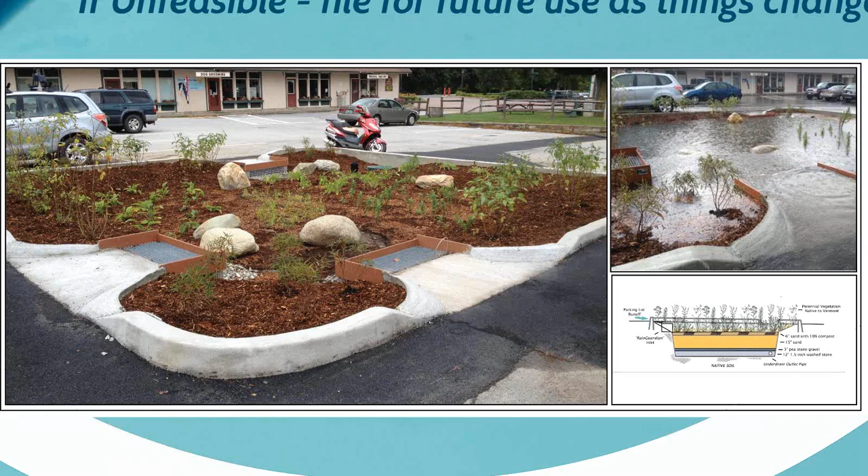Can I add one thing since we're talking about that? With any model, it can be imperfect. There were actually areas that came out as high priority in the model, but there's this effective impervious area versus impervious area. So anything that came out as high priority in the model, we went out and did a field visit to determine whether that source of pollutant was actually getting to a waterway. There were a number of high priority sites that, when we looked at them, had essentially no discharge—there was either a buffer or a grass swale or something already in place. So those sites were ruled out.

But that bioretention in Waitsfield was a perfect one—it was obvious. There was a catch basin, and all the water from the parking lot was going to that. It was a high priority site, so it was kind of a no-brainer.

That gets back to the whole map-visit-model iterative process. You model it, you spend a lot of time mapping and modeling, and then you go out in the field and find out, well, the computer said so, but it wasn't totally true. That's a very critical part of this process—actually going on site and seeing, is it really indeed a problem? Computer modeling can only tell you so much, so that's one of the most critical parts of the process.

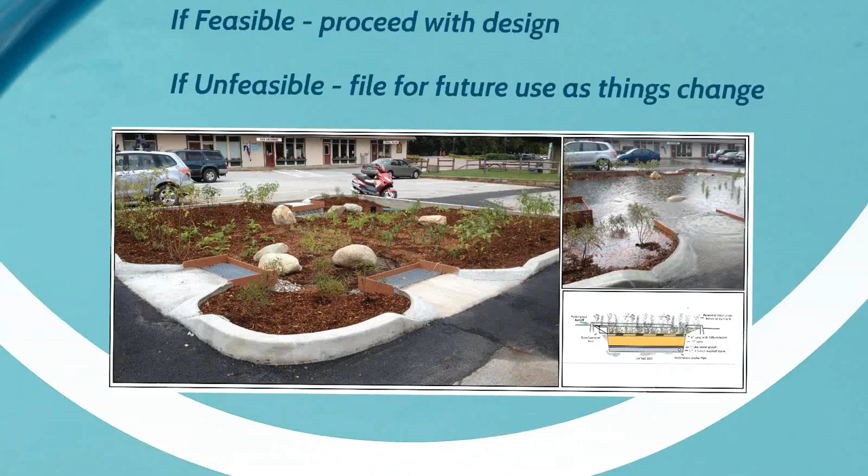It may take a few models and a few visits to really winnow it down—it's not a one-time thing. So that's essentially the end of this template.

This template doesn't necessarily meet all the model outline criteria. That's not in any way a bad thing in terms of this model.

It just means that it doesn't technically meet all the criteria outlined within the Stormwater Master Planning Guidelines. So the criteria it doesn't necessarily meet are problem definition. While it does to some degree define a problem, pollutant loading associated with particular land areas, it's not a water body based problem. It wasn't defined necessarily in the Mad River, looking at a pollution problem like nutrient pollution and working back from there. This is more looking at the land area loading, so it's a bit of a gray area. While it does define a problem, it's not necessarily the holistic problem definition.

As far as existing data collection, it relies on existing data, but typically with the stormwater master planning process you're looking at gathering essentially a library of data for any watershed or community, things like stream geomorphic assessment, macroinvertebrate studies, any other stormwater modeling studies that have been done. This particular study looked at and used a lot of existing data, but didn't necessarily assemble it into a multi-purpose library. It just collected the data it needed to accomplish this. So again, a bit of a gray area, but technically the process looks for that library, a holistic catalog of data usable on a number of different projects into the future.